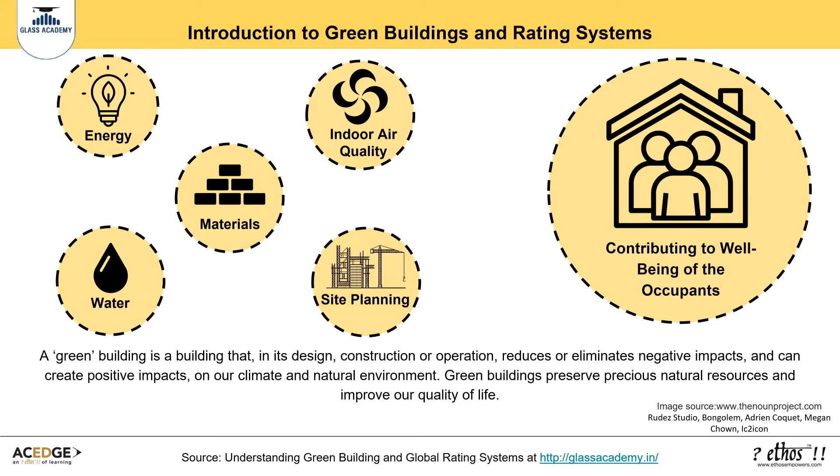Buildings are one of the major causes of pollution, affecting air quality and climate change. Buildings and the act of construction are resource intensive, involving the depletion of non-renewable resources such as ground cover, forests, water, and energy. The green building aims at minimizing the demand on non-renewable resources, maximizing reuse, recycling, and utilization of renewable resources.

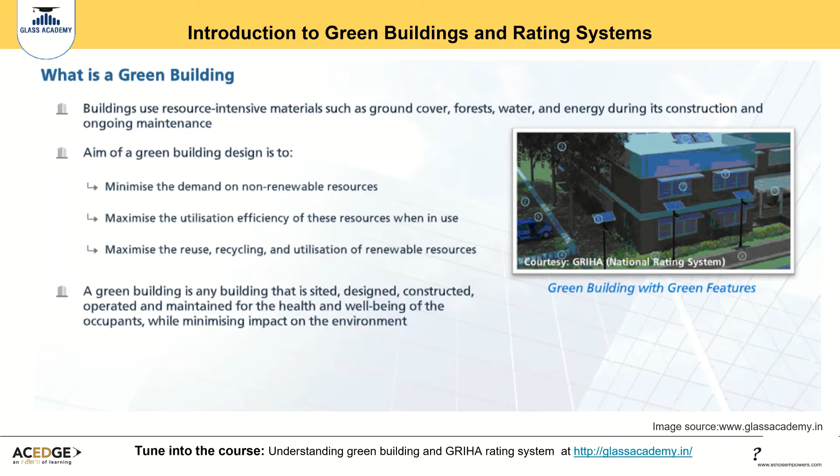Green rating systems for buildings measure and quantify the environmental performance of a given building. India currently has these green rating systems for buildings: Green and Eco-Friendly Movement (GEM), Green Rating for Integrated Habitat Assessment (GRIHA), IGBC rating systems, Leadership in Energy and Environmental Design (LEED), and the WELL Building Standard.

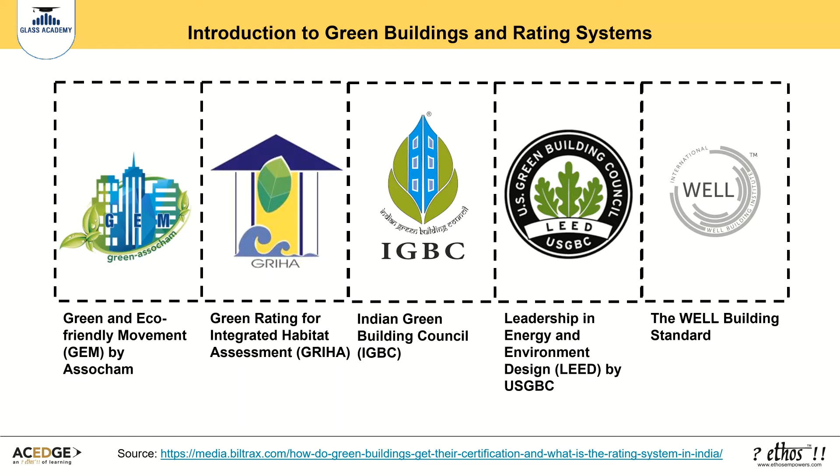These green rating systems aim to quantify the environmental, economic, and socio-economic benefits of green building design with an emphasis on sustainable site planning, optimized energy performance, efficient materials, construction practices, water and waste management strategies, and indoor air quality.

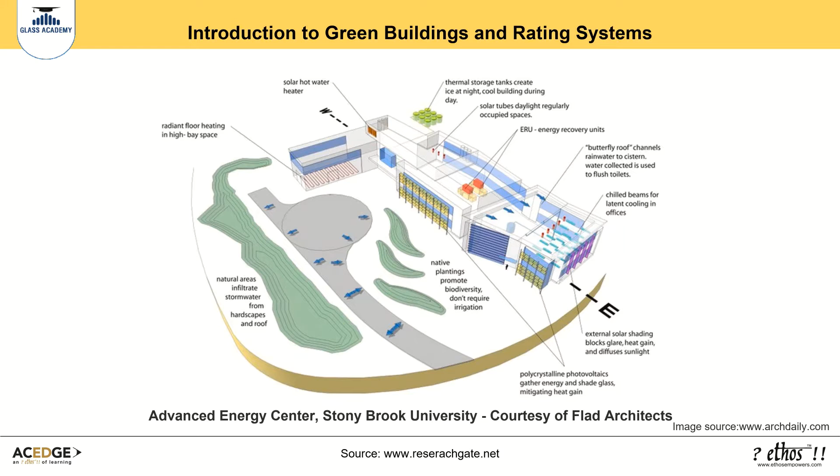Let's look at the GEM rating system by ASSOCHAM. GEM Sustainability Certification Rating Program aims to address the sustainability of a given development through its life cycle from design through construction to operation. A project will achieve GEM 1 to GEM 5 rating levels based on project design, which includes building architectural and elevation design, materials used during construction, HVAC, lighting and plumbing system designs, water and energy consumption of the building.

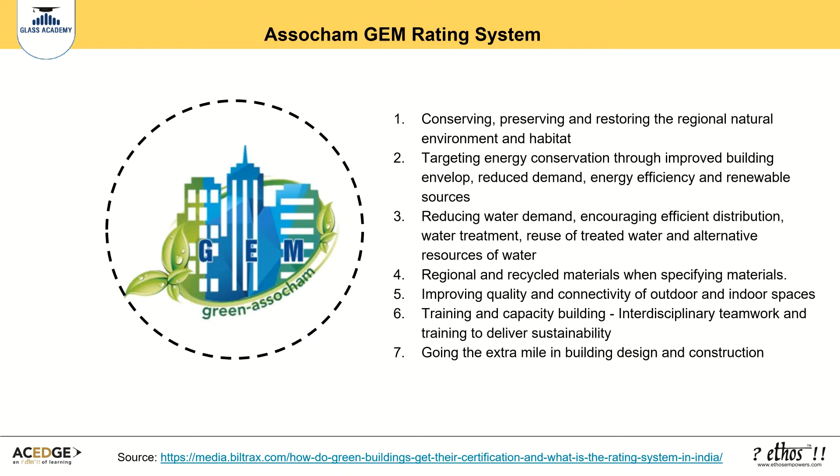Passive cooling techniques can be employed in buildings to provide ambient spaces for everyday living, improving the health and productivity of individuals. High albedo is a measure of how much radiation that hits a surface is reflected without being absorbed. Roof vegetation or high albedo materials or a combination of both for more than 70% of exposed roof areas can reduce the heat island effect in buildings.

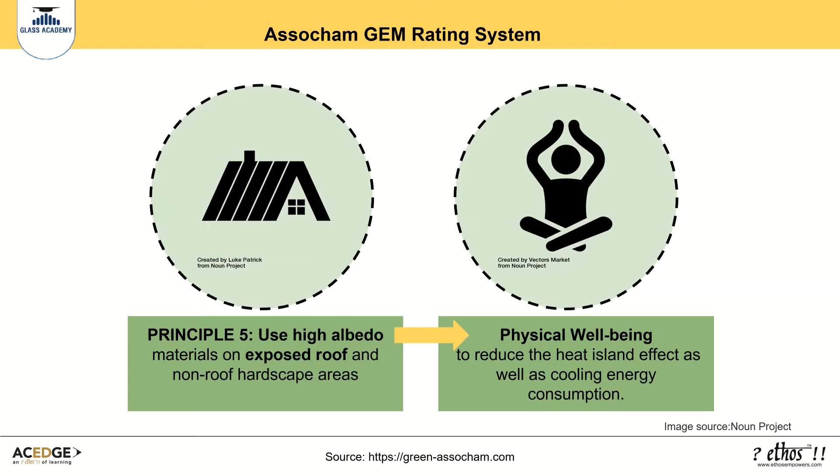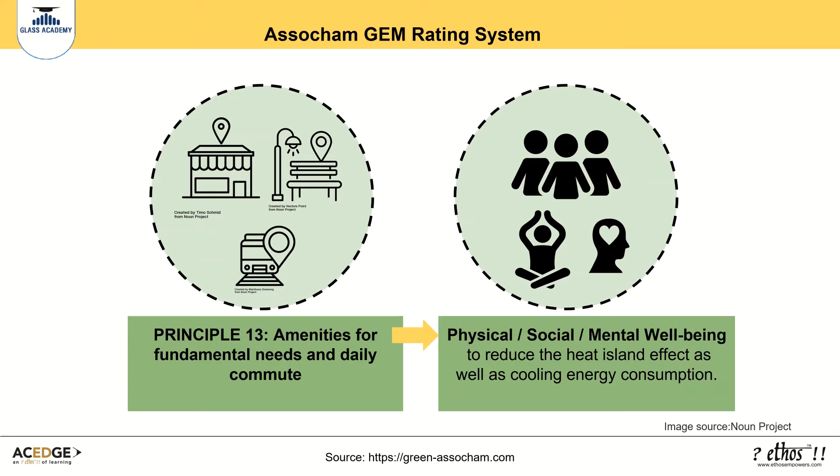This criteria encourages the developers to provide amenities for fundamental needs such as recreational facilities, canteens, and first aid facilities. Further points are provided for locating the development in proximity to existing schools, markets, public parks, and transit hubs.

Limiting VOC content in interior paints, adhesives, sealants, and coatings to protect indoor air quality and occupational health. This is ensured through the use of low-emitting or non-emitting products that will significantly reduce the strength of VOC exposure indoors.

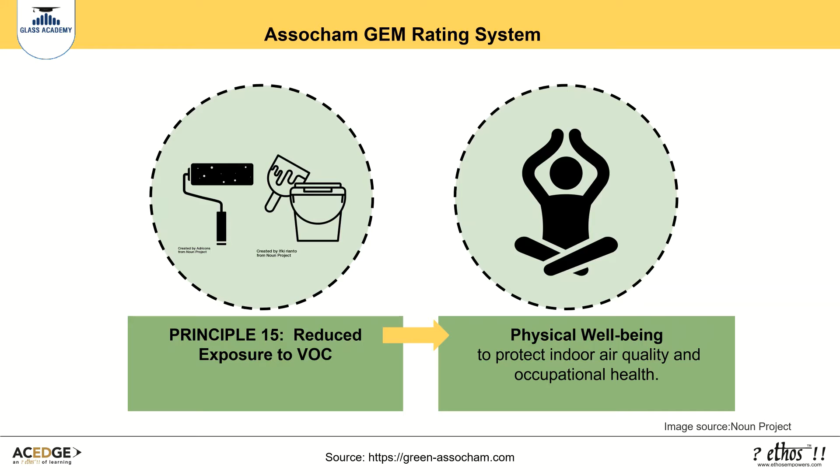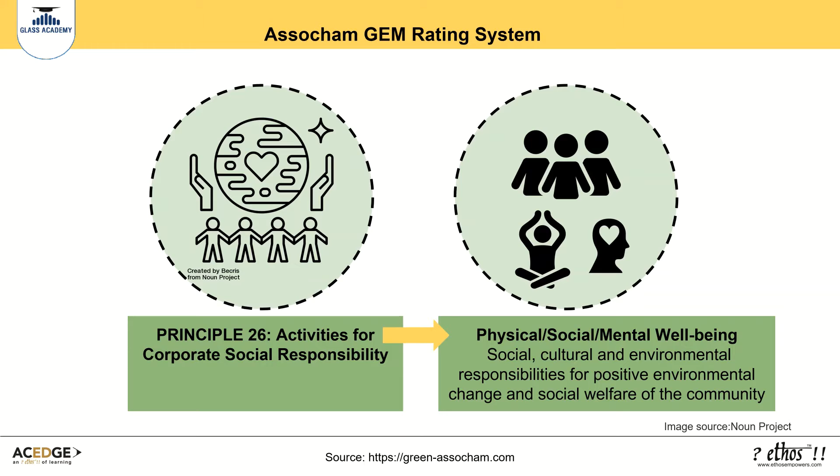This criteria looks into the activities for corporate social responsibility that should urge organizations to take social, cultural, and environmental responsibilities for positive environmental change and social welfare of the community. This can be done through several means, such as measures to eradicate hunger, promote education and gender equality, protection of national heritage, and slum development schemes, to name a few.

The Vadodara Airport Terminal in Gujarat, India, is a GEM 5-star rated building. The design has been carefully structured by assessing the material palette and adherence to ECBC codes, ensuring energy conservation. STP and rainwater harvesting programs are being adopted for water conservation.

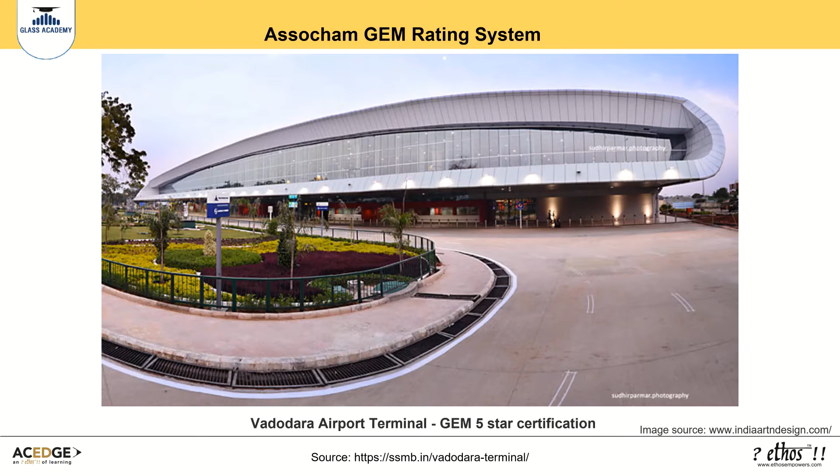Bricks have been replaced by AAC blocks, autoclaved aerated concrete blocks, which ensure maximum thermal insulation. The single sheet of steel that encompasses the built form has an extended overhang on the north-south direction for protection from the harsh sun. Let us look at the GRIHA rating system.

Green Rating for Integrated Habitat Assessment is the national rating system of India for any completed construction, endorsed by the Ministry of New and Renewable Energy, Government of India and TERI. It is an assessment tool to measure and rate a building's environmental performance.

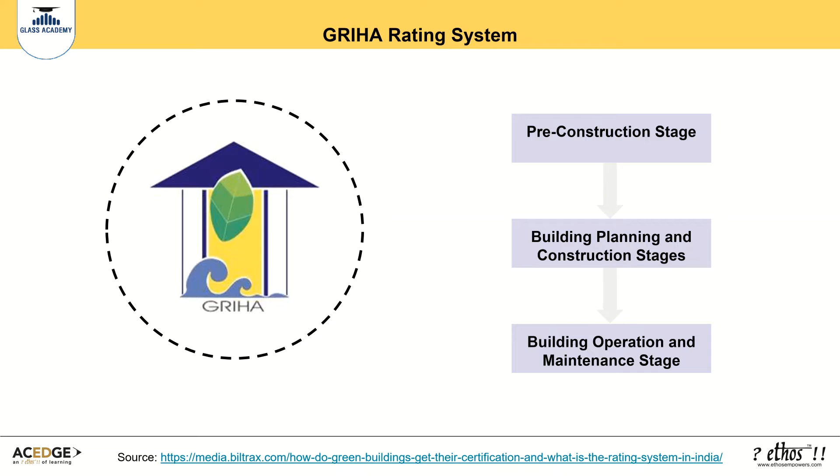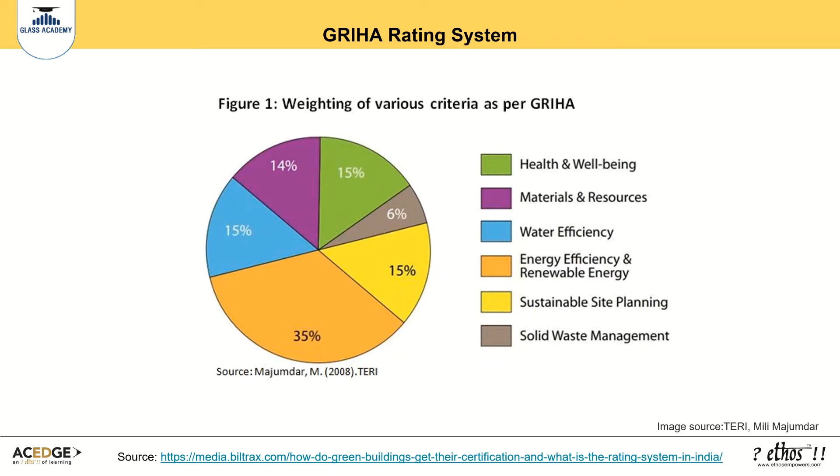The stages of the life cycle that have been identified for evaluation in GRIHA are pre-construction stage, building planning and construction stages, building operation and maintenance stage. GRIHA provides a rating of up to 5 stars for green buildings and dispenses points based on criteria met by any builder. It comprises a set of 34 criteria. Health and well-being sector has around 15% weightage as per GRIHA standards.

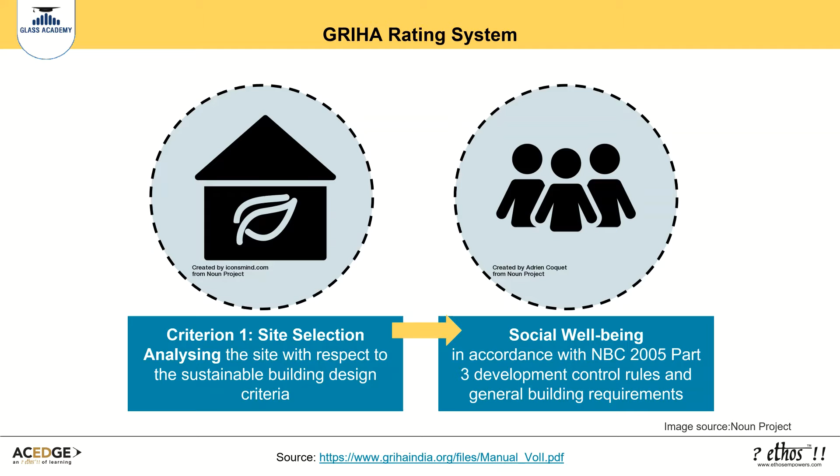The process of site selection for sustainable development involves identifying and analyzing the site with respect to sustainable building design criteria. There are some criteria elaborated here with respect to health and well-being of the occupants. The first criterion is site selection. Site selection is the first step to a sustainable habitat and needs to be done appropriately prior to commencement of the design phase. Site selection should be carried out in light of a holistic perspective of social well-being and other factors.

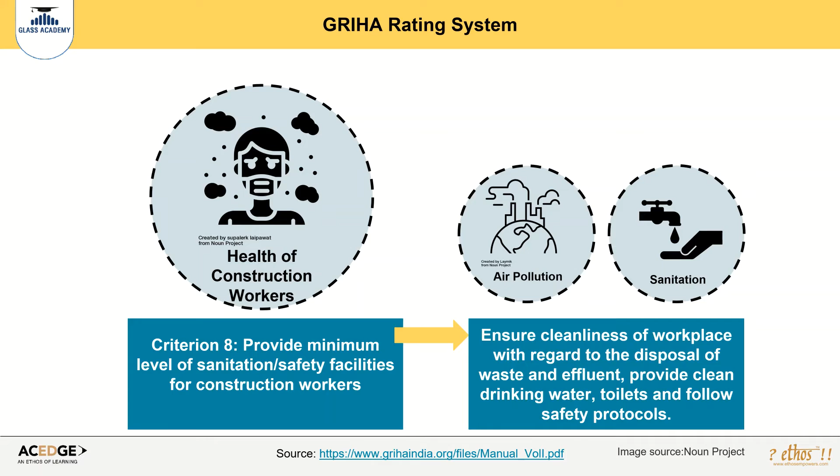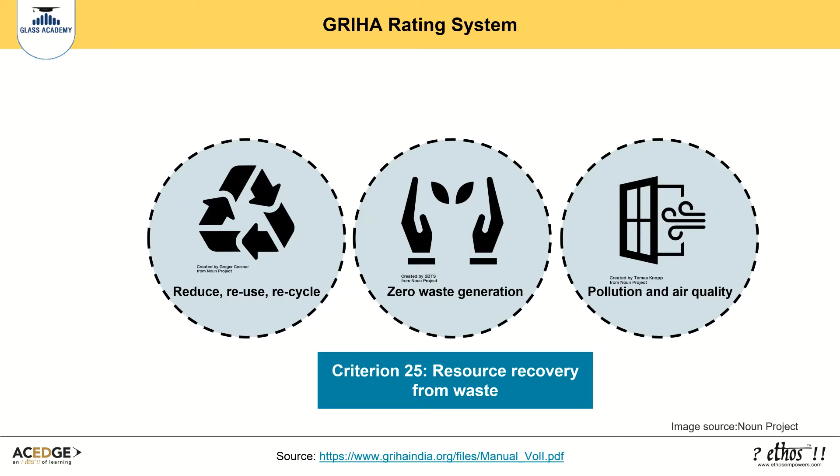Construction activities are large polluters of the environment. Large volumes of suspended particulate matters are released during construction work, leading to air pollution. Unhygienic site sanitation facilities cause damage to the environment and to the health of the construction workers. Green buildings should address these issues. Building construction and its operation affects health and well-being of people in many ways. Green building practices and measures should be integrated into the design process to ensure the health and well-being of all the occupants. Hence, it is important to ensure healthy indoor air quality, water quality, and noise levels, and to reduce the global warming potential. Resource recovery systems for biodegradable waste need to be employed as per the solid waste management and handling rules.

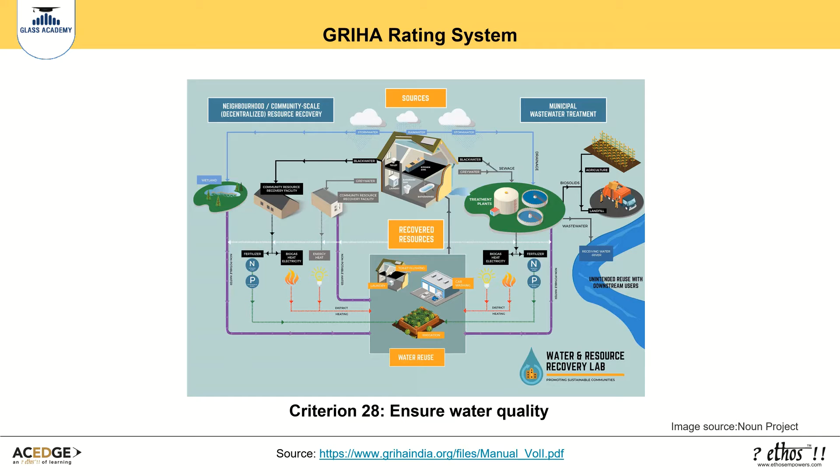Ensure water from all sources such as groundwater, municipal water, treated wastewater meets the water quality norms as prescribed by the Indian standards for various applications. In case the water quality cannot be ensured, provide necessary treatment of raw water for achieving the desired concentration for various applications.

Suzlon One Earth Global Corporate Headquarters by architect Christopher Benninger achieved GRIHA 5-star certification.

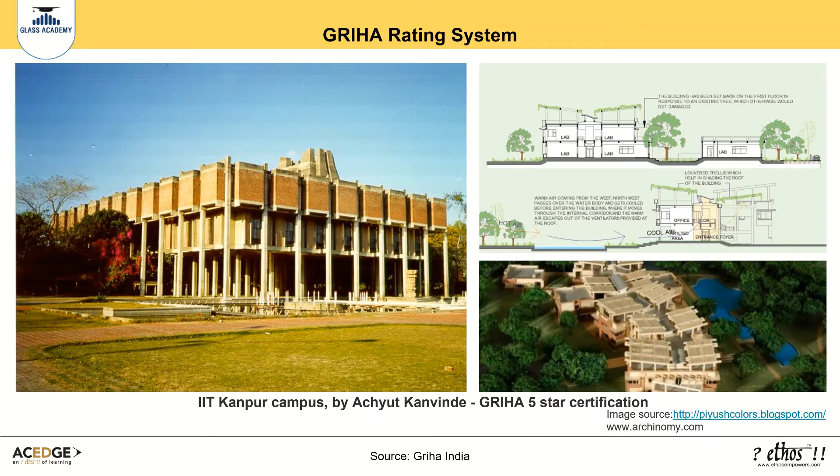The architecture and site planning of the IIT Kanpur campus, designed by Achyut Kanvinde, has a 5-star GRIHA rating. The buildings on this campus have a combination of active and passive techniques involving inclusion of a water body to control the microclimate, orienting the building along the north-south axis, use of different kinds of vertical and horizontal shading devices, solar panels on the roofs of the structure to utilize solar energy for electricity, optimized window shading through the use of low E glass and shading devices.

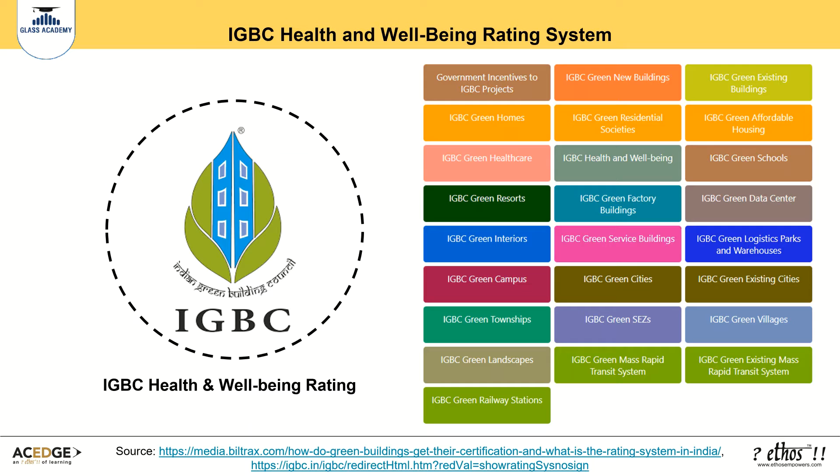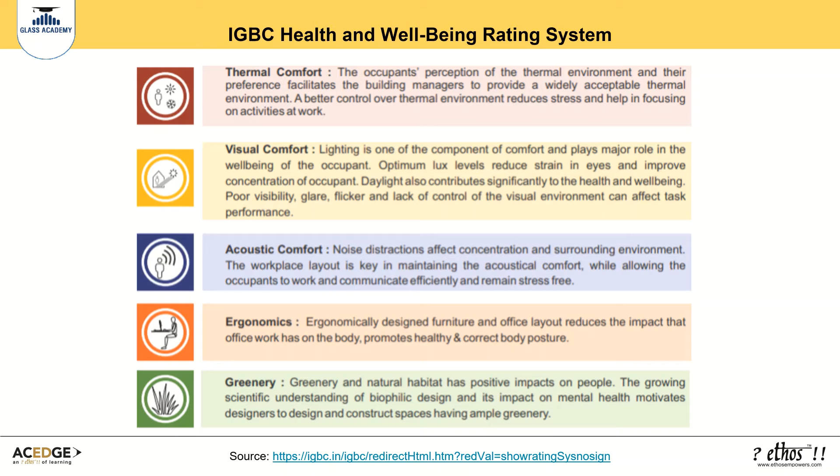Let's look at the IGBC Health and Wellbeing Rating System. IGBC Rating System is a voluntary and consensus-based program. This rating system would facilitate the development of energy efficient, water efficient, healthy, and more productive environmentally friendly factories. The IGBC rating system incorporates well-being through factors like thermal comfort, visual comfort, acoustic comfort, ergonomics, and interior layout and greenery, fitness, promoting walking through green transit, sanitation and hygiene, and increasing awareness about green buildings.

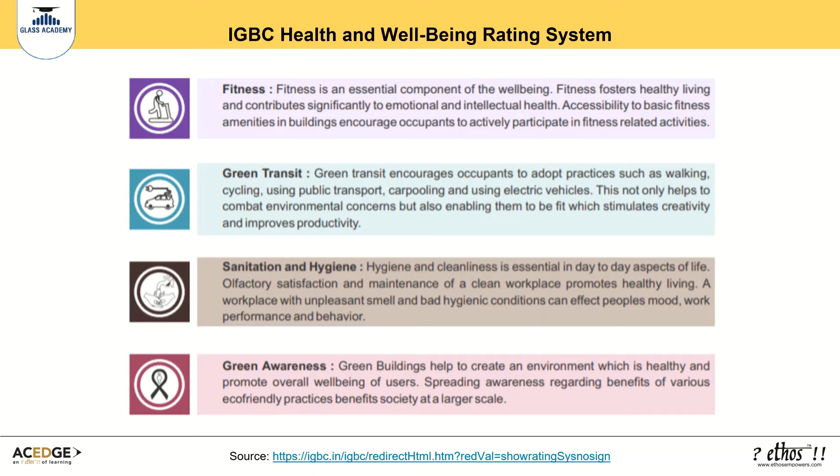A holistic senses body-mind approach, treating a person as a whole, including his or her body and mind, is required for enhancing the well-being of occupants. The occupants perceive the built environment through their 5 senses: smell, taste, sight, touch, and sound. The 5 elements of nature, earth, water, fire, air, and the sky, which make up the built environment, affect physical, emotional, intellectual, and social well-being of the occupants through these 5 senses.

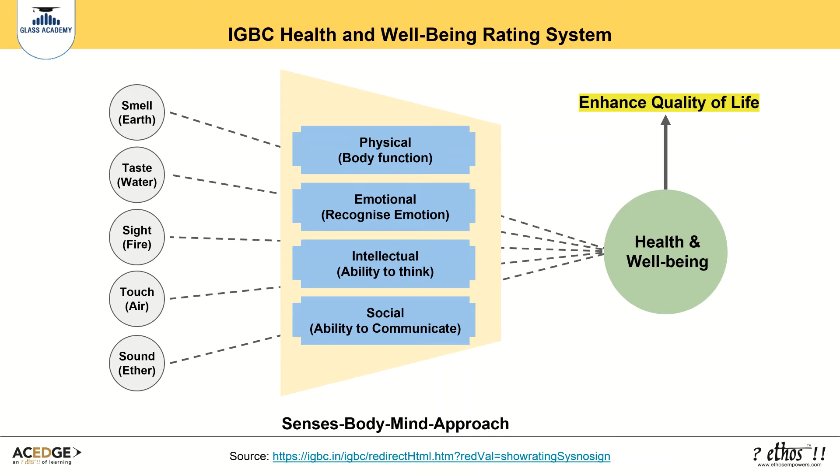The objective of the rating is to facilitate the buildings to incorporate people-centric measures for enhancing health and well-being. IGBC Health and Well-being Rating for occupants addresses various features under 3 main aspects of health and well-being: physical, emotional and intellectual, and social. The IGBC Health and Well-being Rating is applicable for buildings which are occupied and in operation for at least 1 year.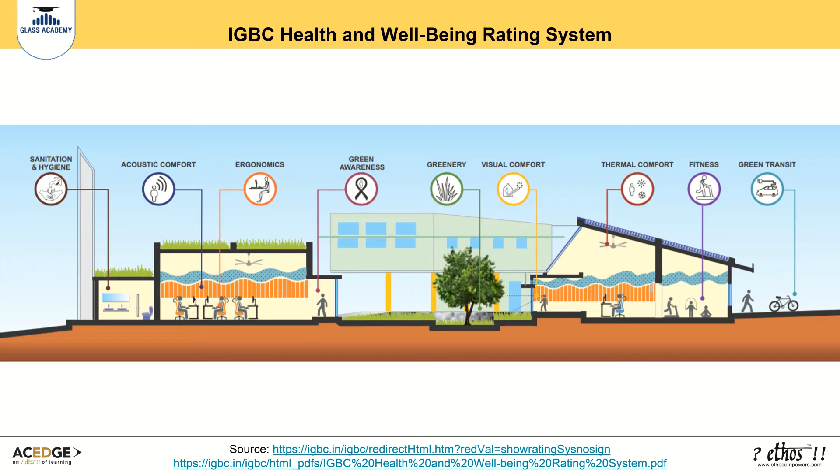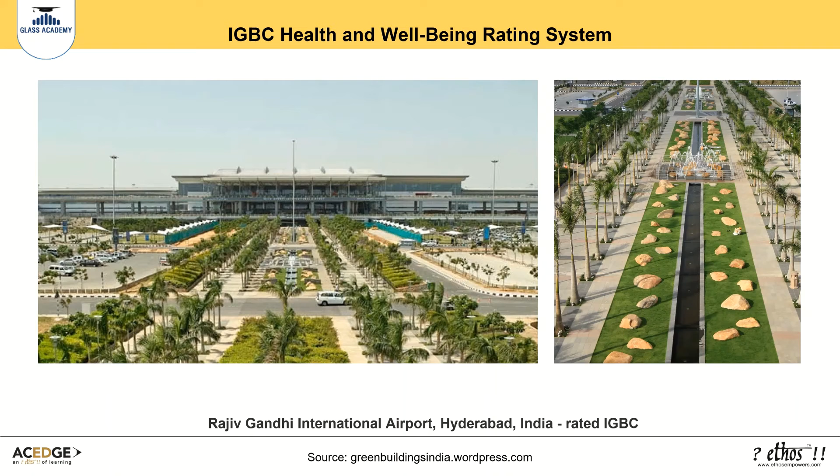The Rajiv Gandhi International Airport has incorporated several green systems such as creation of a green belt with local species, recycling waste food into compost, saving energy, and rainwater harvesting. CII Sohrabji Godrej Green Business Center, designed by architect Karan Grover, is the first LEED Platinum rated building in India.

55 to 60% of the roof is treated with vegetation cover, and the remaining portion is covered by solar photovoltaic panels with a 24 kilowatt capacity. The 100 to 120 units of power generated per day is fed into the grid, meeting 20% of the total energy cost of the building.

Let us now look at the LEED rating system. LEED is the most widely used green building rating system in the world. Available for virtually all building types, LEED provides a framework for healthy, highly efficient, and cost-saving green buildings. LEED certification is a globally recognized symbol of sustainability achievement and leadership.

LEED is for all building types and all building phases, including new construction, interior fit-outs, operations and maintenance, and core and shell. LEED is the most widely used green building rating system in the world. The impact categories are climate change, human health and well-being, water resources, restoring biodiversity and ecosystem, promoting sustainable materials, building a greener economy, and enhancing community health.

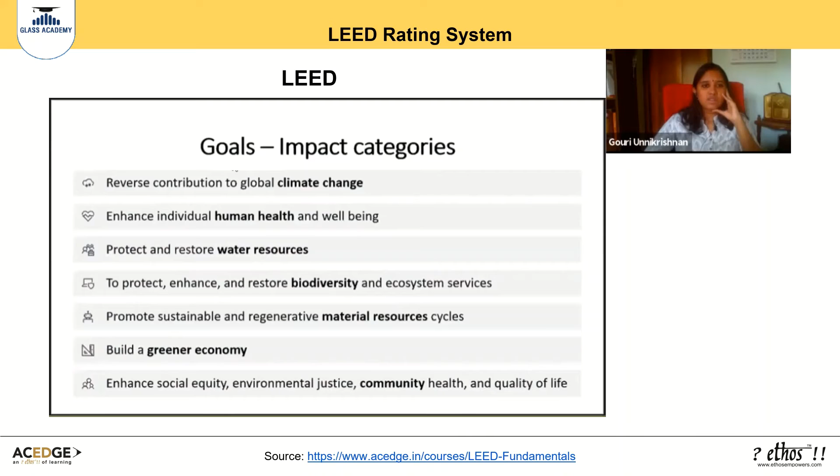The credit categories in LEED rating system include location and transport, sustainable sites, water efficiency, energy and atmosphere, materials and resources, and indoor environment quality.

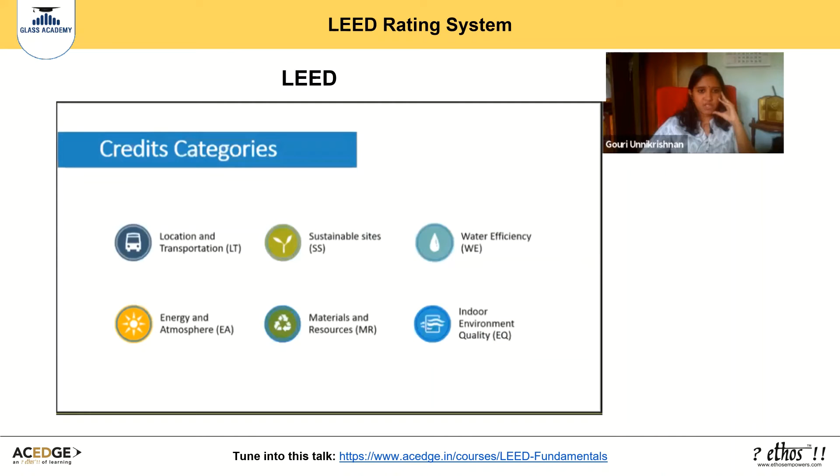LEED rated projects aim at protecting the health of people across the globe via macro level and micro level strategies. LEED incorporates strategies targeted at improving the health specifically of the occupants in the building by optimizing indoor air quality, material impacts, lighting, biophilia, sound, and other parameters.

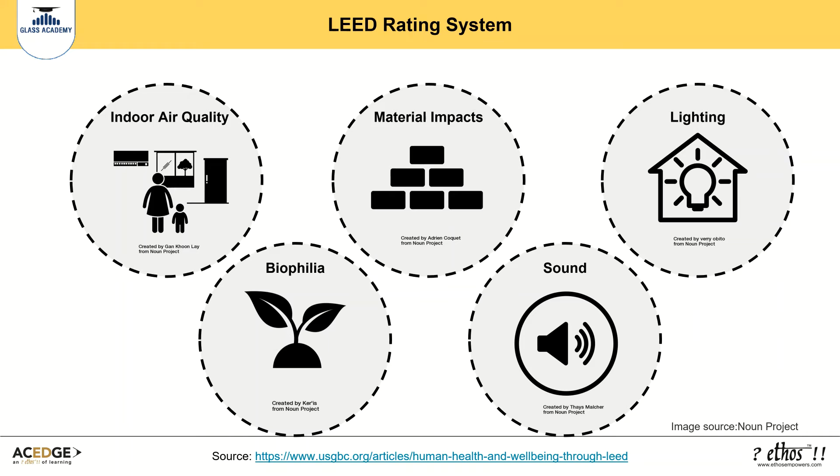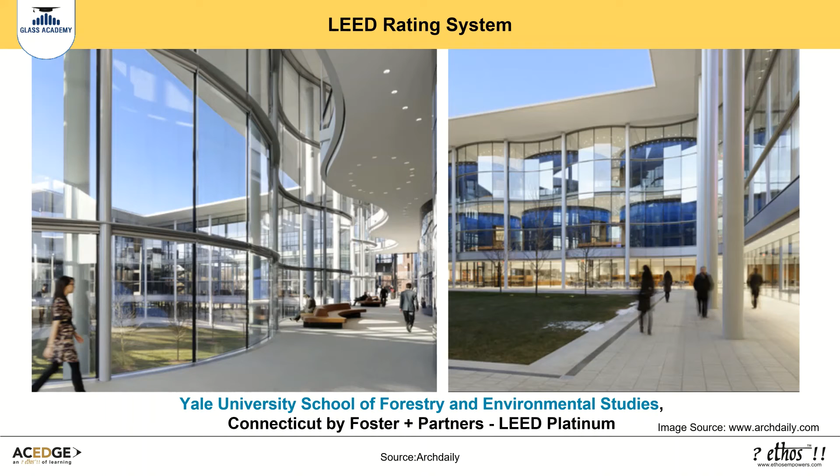Targeting the highest environmental standards, the sustainable design responds to the unique climate of New Haven and the patterns of use specific to a university faculty. The building utilizes chilled beams, a displacement system of ventilation and solar shading, and the building's high-performance envelope with solar-responsive shading naturally reduces energy demand.

Let us look at the WELL building rating system. WELL is third-party certified by Green Business Certification Incorporated, the same company that administers LEED certifications. A WELL certification is valid for 3 years, a timeline that encourages a vigilant commitment to the standard.

WELL considers aspects of a space: air, water, nourishment, light, movement, thermal comfort, sound, materials, mind, and community. For a building to be WELL certified, it must receive passing scores in every concept, indicating that each feature meets the standard's requirements for human well-being. Finally, a building may receive silver, gold, or platinum certification.

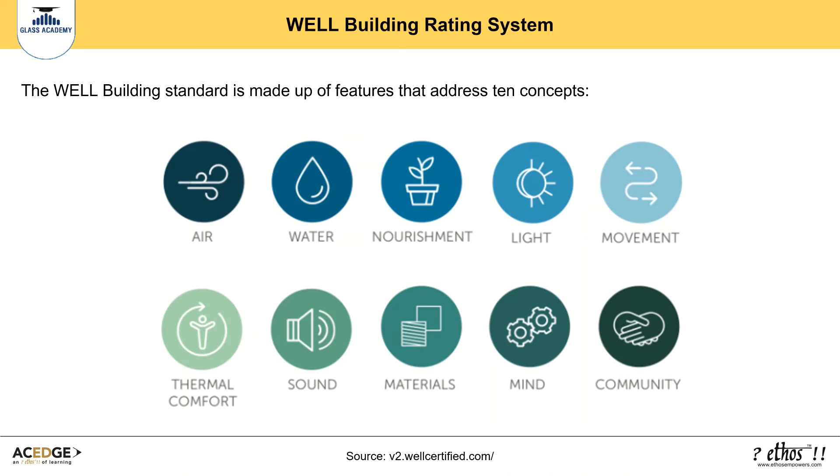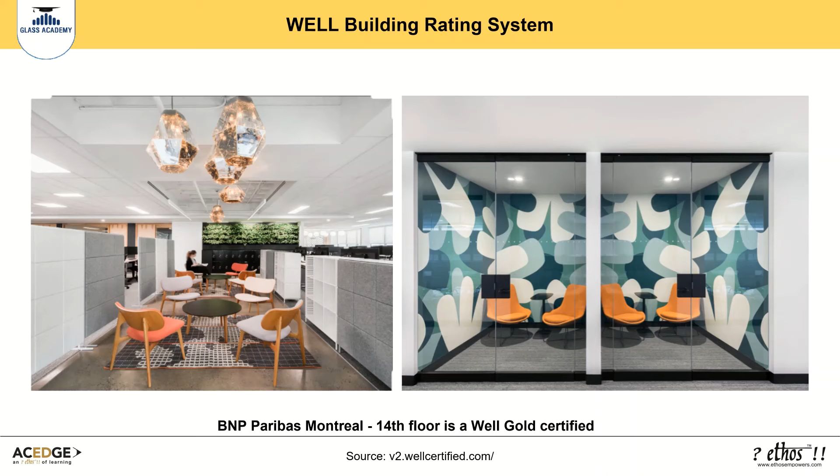The project is located in downtown Montreal in Quebec, Canada. All floors are pursuing a WELL certification for a total of 120,000 square feet to improve the employees' well-being. Local artists were invited to paint murals in the hallways and the stairs to represent Montreal's life.

The innovative 8,500 square foot office located in downtown Washington, D.C. was WELL certified at the platinum level in 2017. The ASID office features human-centric design elements including biophilic design strategies which introduce natural elements into a space to help reduce stress and increase air quality, sound masking systems, rigorous water quality standards, and a circadian lighting system developed to expand efficiency by helping to regulate the body's physiological processes.

Fresh fruits and vegetables are provided, sit or stand desks are present at workstations, and a wellness room is available to provide mental breaks among countless other features.

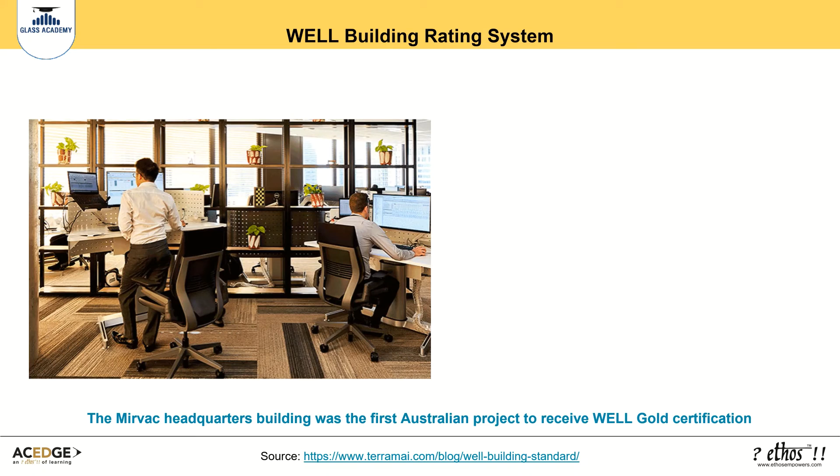The first project in Australia to be awarded WELL certification at the gold level. Mirvac is an Australian property company that wanted to create a building that educates through design, form, and function so employees and visitors can go home smarter and healthier.

An internal staircase connects all 6 floors of the Mirvac headquarters and is centrally located to promote movement and connection. The staircase acts as both a visual and practical element of the space, drawing people together and also encouraging them to stay active throughout the day.

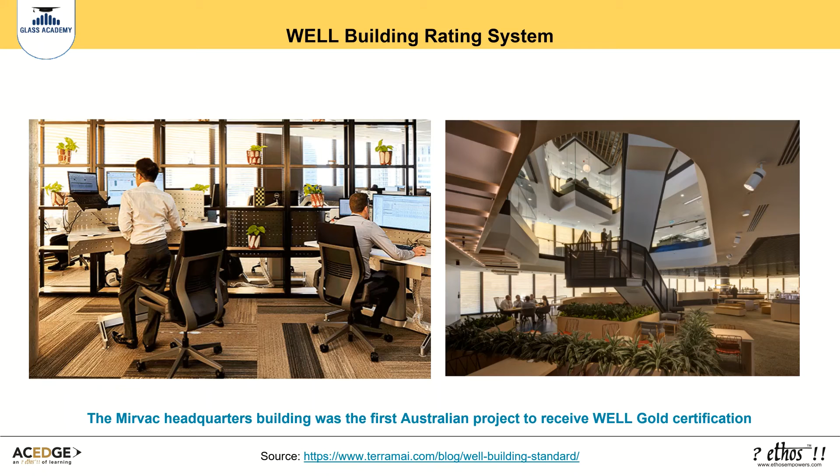The National Building Code of India (NBC), a comprehensive building code, mainly contains administrative regulations, development control rules, and general building requirements, fire safety requirements, stipulation regarding materials, structural design, and construction, including safety, building and plumbing services, approach to sustainability, and asset and facility management.

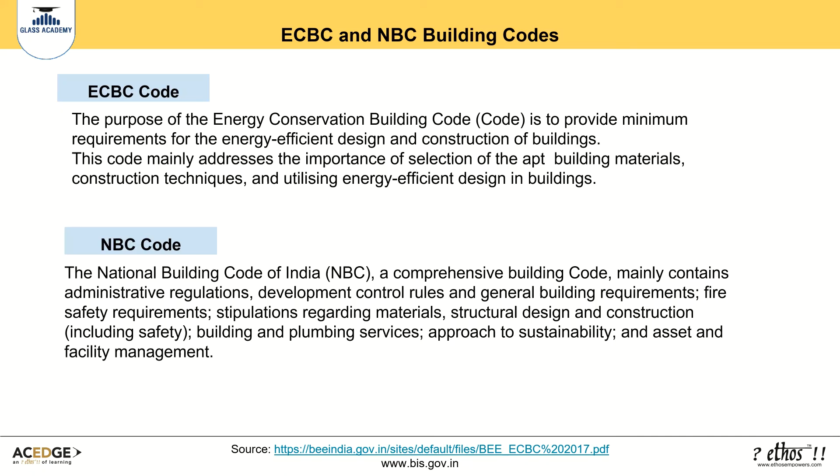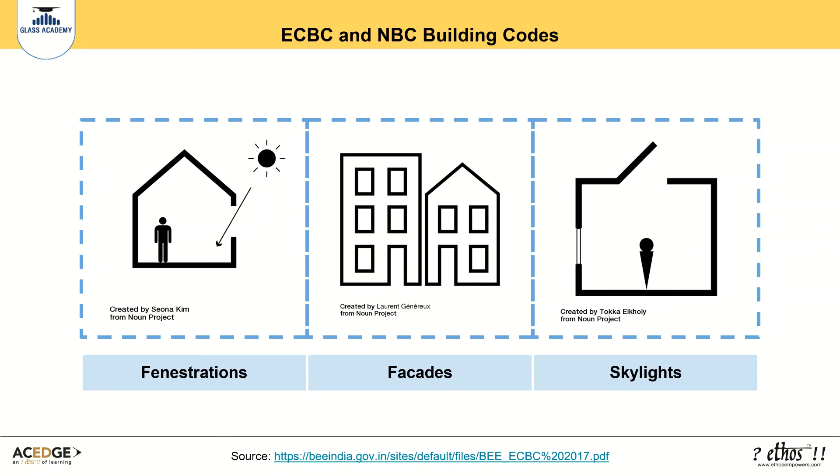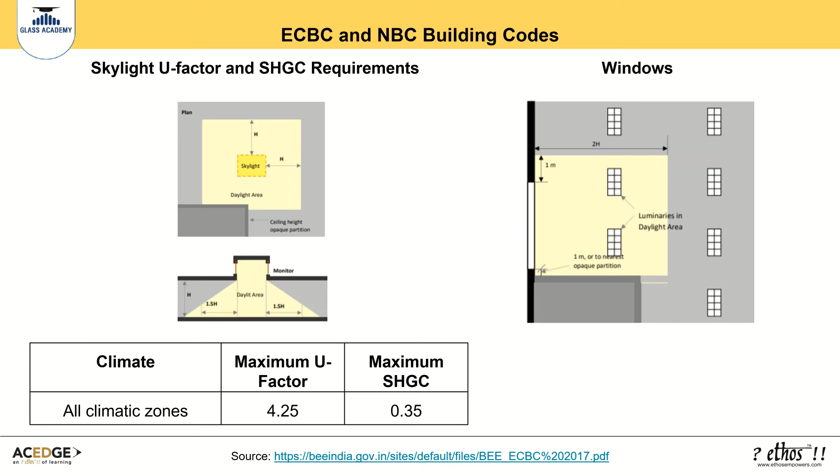Building codes like ECBC and NBC specify appropriate building orientation, solar heat gain coefficient factors of the building envelope. Building envelope includes fenestrations, facades, and skylights. The daylight illuminated floor area under horizontal fenestration or adjacent to vertical fenestration have also been specified in ECBC 2017.

Exterior shading devices are more effective than interior devices in reducing solar heat gain because they block radiation before it passes through a window. The projection factor for various shading devices differs based on the shape, size, and configuration. Further, the solar heat gain will vary based on the material used for the vertical and horizontal fins.

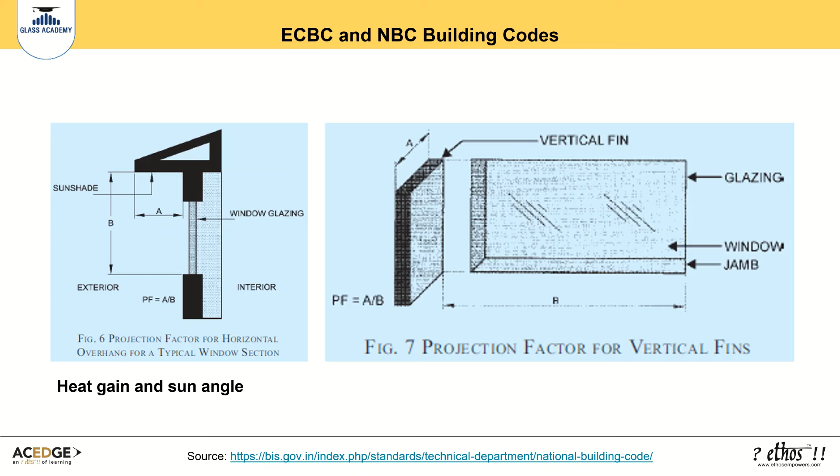Additional glazing layers provide more barriers to solar radiation, reducing the SHGC or solar heat gain coefficient of a window. Tinted glazing such as bronze and green provide lower solar heat gain coefficients compared to clear glass. Spectrally selective glazing, including some low E coated glazing with solar heat gain, blocks out part of the heat.

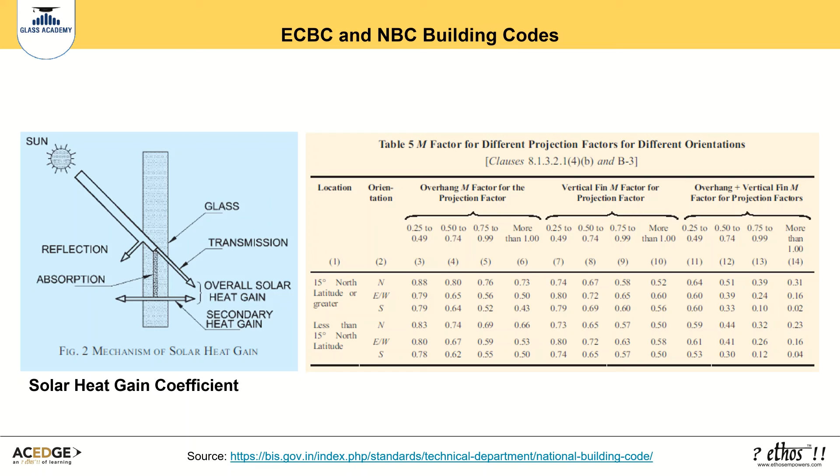Solar heat gain components for a window having an external shading device can be calculated by multiplying the SHGC value of the window with the M factor given in the table for different projection factors for different orientations.

Daylighting usually reaches only a certain surface area of the room. It becomes important to understand the zone covered by daylight to design artificial lighting for any space. The daylit zone associated with a window is defined as an area having a depth which is twice the window height and having a width that is 2 meters larger than the window width, according to NBC guidelines.

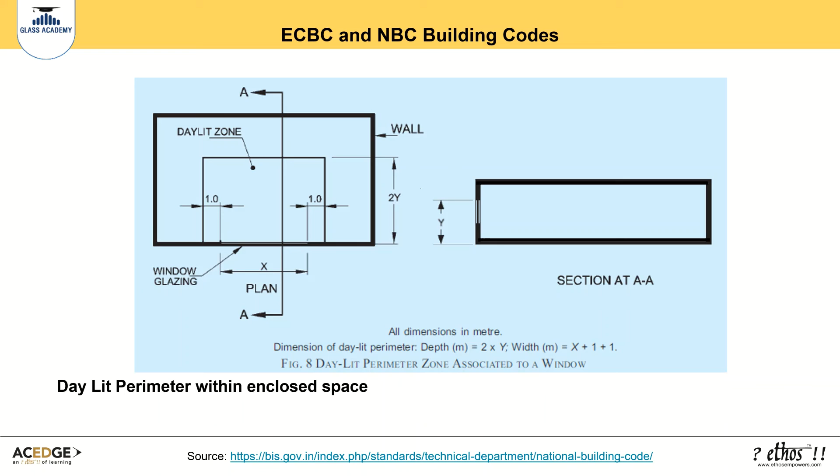Different materials have varied levels of embodied energy. Stabilized earth blocks, fly ash, and bamboo have very low embodied energy as compared to aluminum, stainless steel, copper, and zinc.

LCA of Building Materials intends to assess the potential environmental impacts at every stage in the life cycle of a material, right from the raw material sourcing, processing, manufacturing, and finishing up to the product installation, maintenance, and ultimately reuse, recycle, or demolition.

Find more details on sustainable design parameters and the design of fenestrations in the National Building Code.

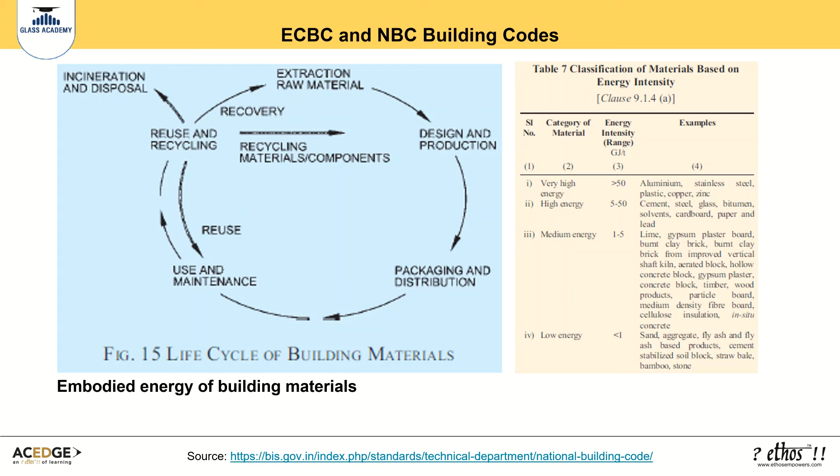Here are some thermal properties of glass as a material in buildings mentioned in ECBC 2017.

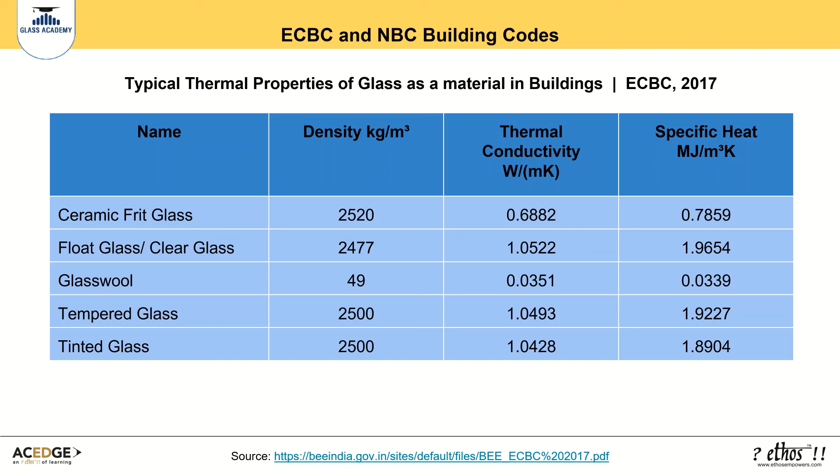What is the role of glass in green buildings? Let us now understand the role of glass in green buildings. As we studied before, glass is a transparent, indispensable construction material. It plays a significant role in achieving superior indoor environmental quality and energy efficiency.

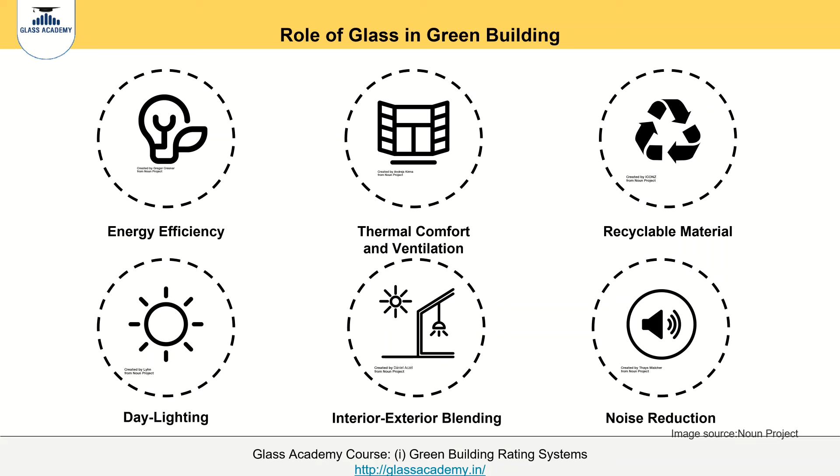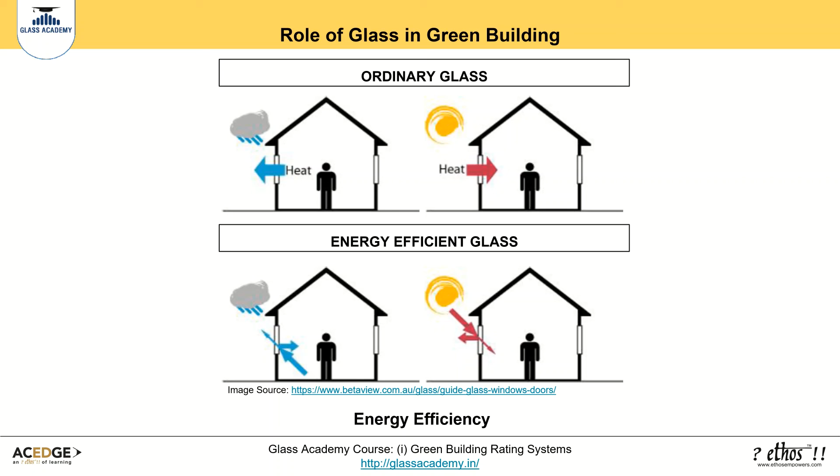Glass offers certain benefits like energy efficiency, thermal comfort and ventilation, recyclable material, daylighting, interior-exterior blending, noise control, and self-cleaning properties. Let us dig more into those benefits. High-performance glass helps in controlling both solar and thermal heat in interiors and helps in maintaining temperatures. This in turn helps in lowering air conditioning costs.

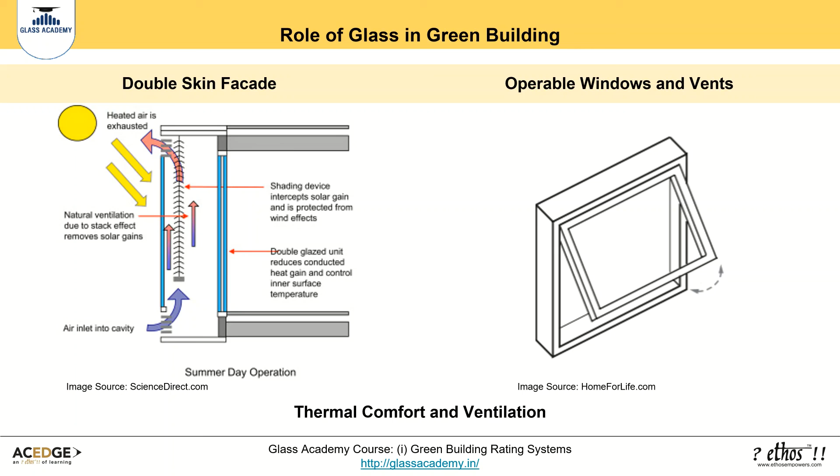Thermal comfort of occupants in a building can be brought about with the use of double skin facade, operable windows and vents. Glass is 100% recyclable. The manufacturing process of glass uses 18% recycled content, which is broken glass pieces. Here, glass bottles have been used as a recyclable material in buildings.

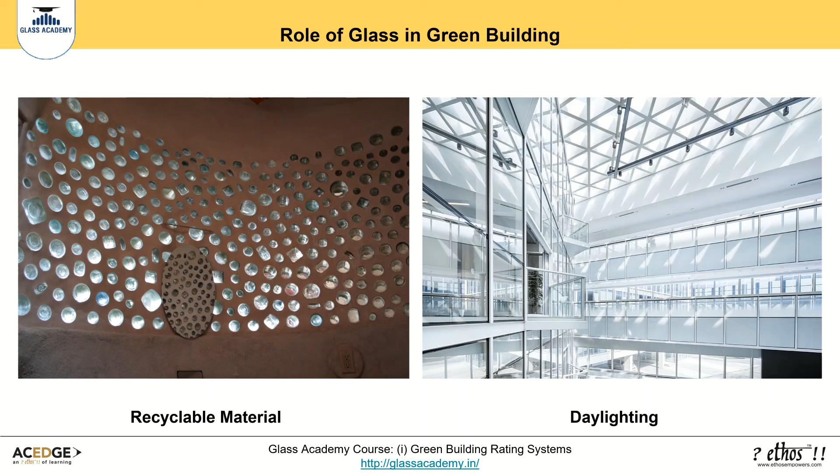Glass fittings offer a high amount of natural daylighting, thus reducing dependence on artificial lighting. Glass is a recyclable material and hence it can be remelted an infinite number of times, and the architectural glass industry has the potential to be a perfect example of a scalable circular economy in action.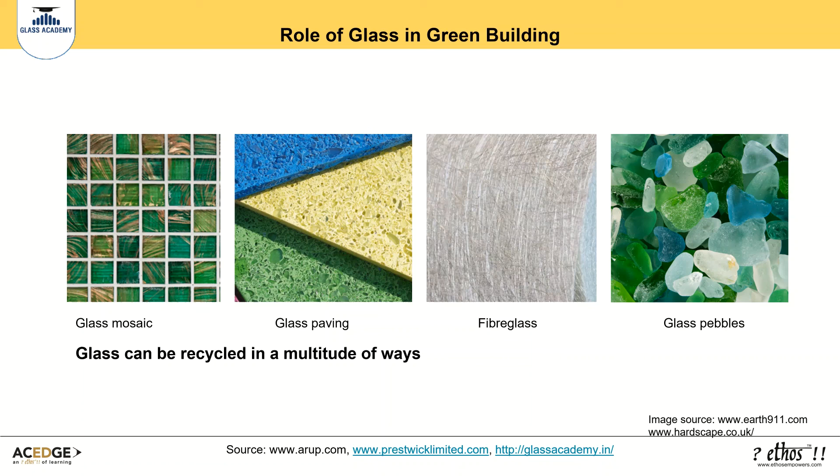Recycled glass mosaics and tiles provide a highly aesthetic option as bath tiles, tiling in a pool, or backsplash for counters. Recycled glass is used to make outdoor paving. Unwanted glass from glass bottles is crushed to make fiberglass, which is widely used as an insulation material.

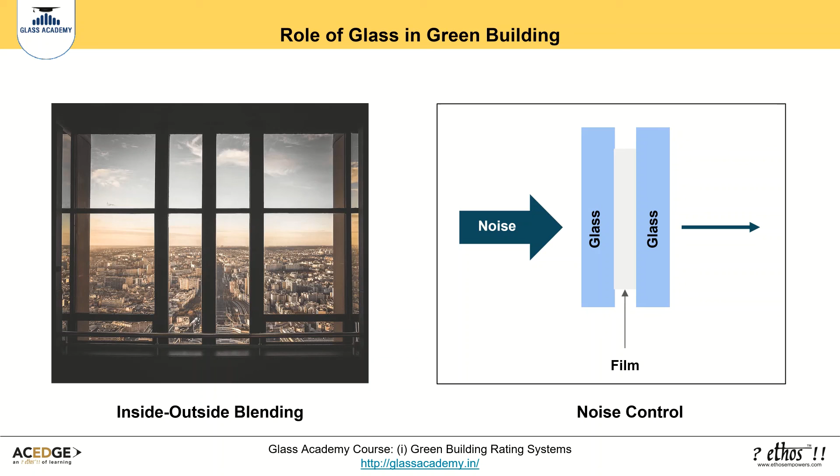Use of glass blends the indoor area with the outdoor, providing views to the surroundings. Use of appropriate laminated or double glazed facades helps in achieving a high degree of acoustic comfort by keeping away noise penetrating from the exteriors into the interiors, thus ensuring a calmer atmosphere inside. We will be looking at glass as a building material further in the next chapter.